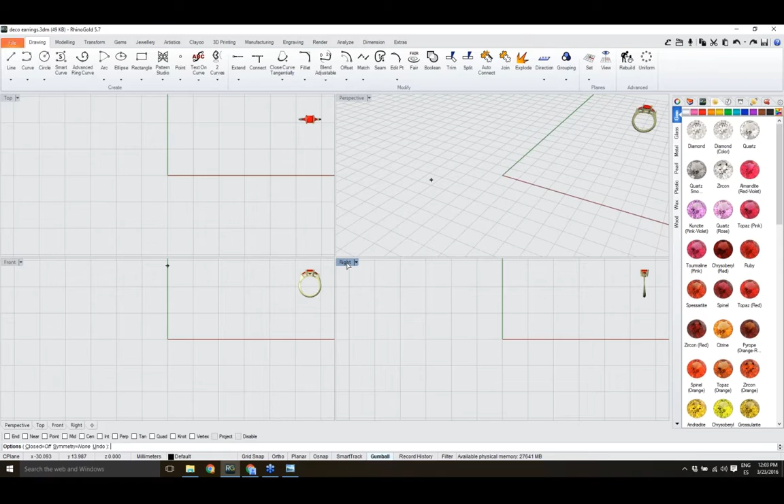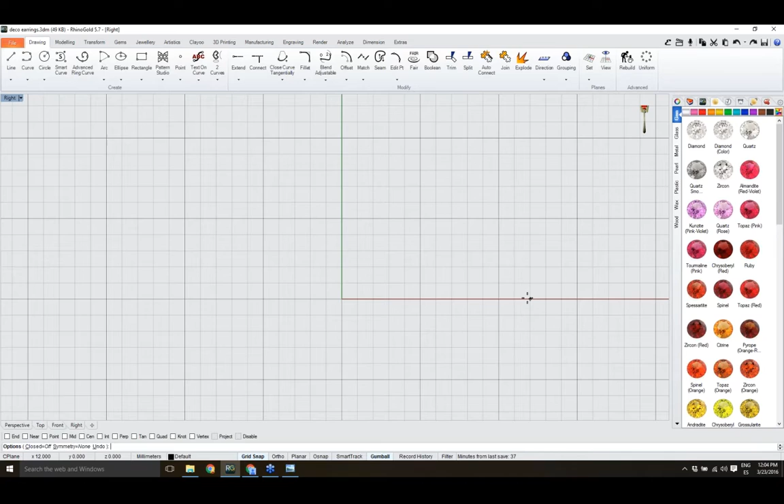I just double click to clear the right viewport, and the idea now is to define the curve, and when we are defining the curve we will also be defining the measurement for this earring. So I activate the grid snap to make sure I'm using these points from the grid. I'm going to start at these points and define my curve, the curve where I'm going to apply the earring. Using the grid as reference, we have 24 millimeters from this point to this one - this will be the length of my earrings.

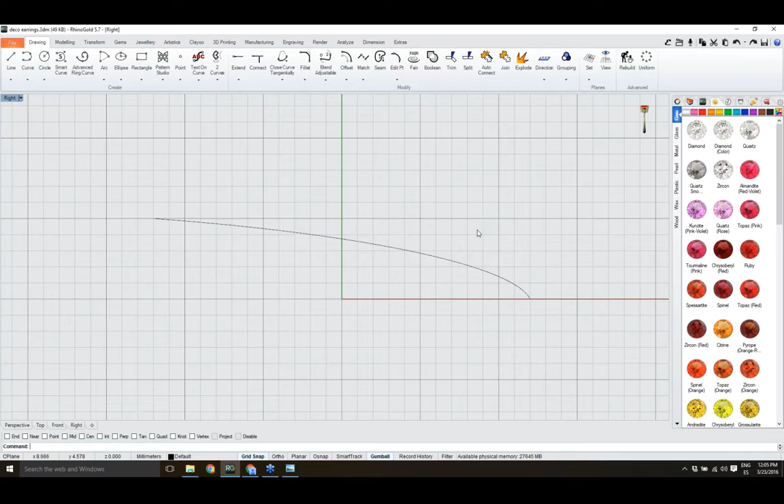Remember, if we need to change anything on the curve, we can at any moment edit the control points - just with the Edit Points tool, still under the drawing tab, if we need to adjust any of these points. In this case, I'm just going to press escape because I'm happy with the curve, I don't need to edit it. And finally, back to the perspective view, I can see my curve, and I will use it to apply a channel to define the central part of the earring.

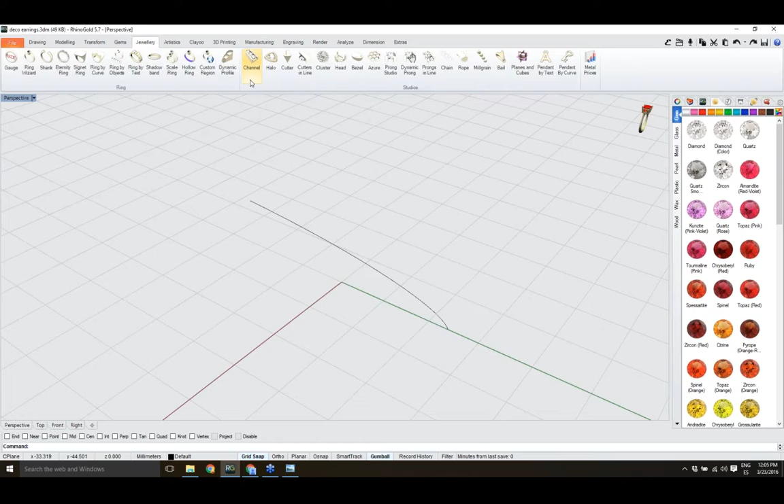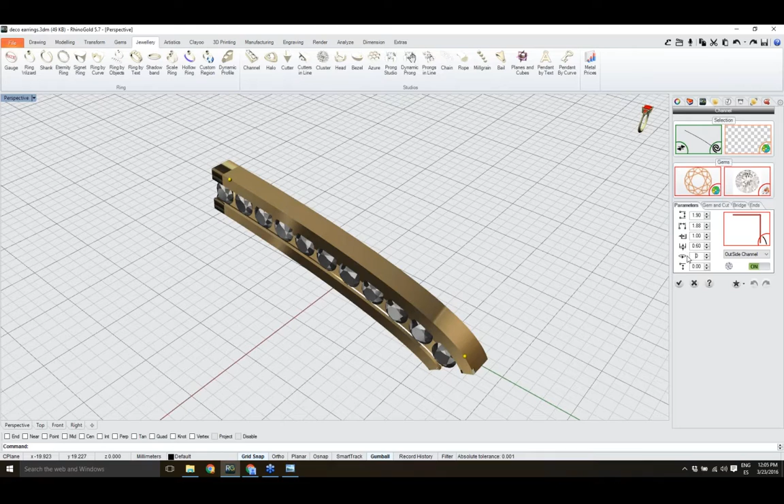To do it, under the Jewellery tab, we can find the Channel tool - this is the icon. I just click on the Channel tool, and in the side panel, the first step is I need to select the curve where I need to apply my channel. So I just click on my curve, and you will see that automatically I have a channel applied on this curve. Of course, I need to define the options - in this case I will use the rotation option to adjust the position to 90 degrees rotation, and as you can see, the channel will have the orientation to the top as I need.

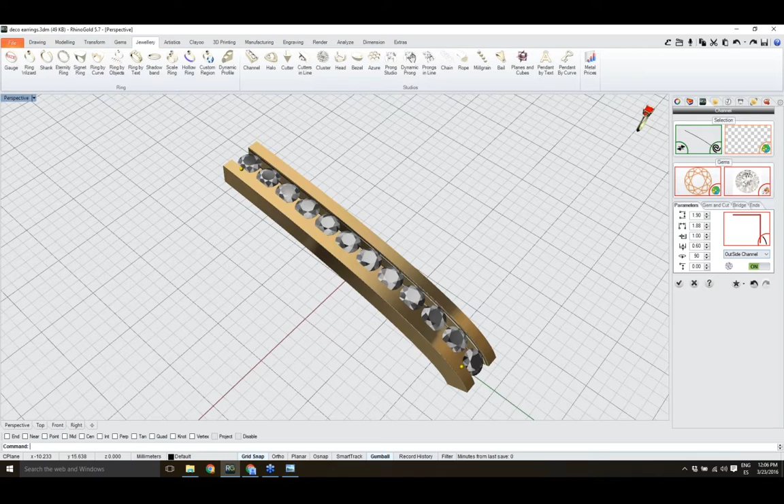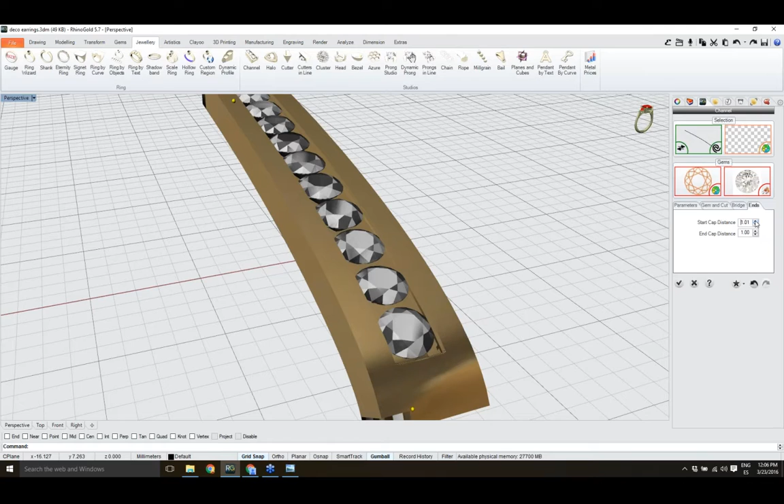Also, inside the Channel tool, we will find several options. As you can see, this is open at the end, so I have the option to use OutSide Channel - this option will allow me to make the ends for the channel. Of course, I will need to go to the Ends tab to define exactly the measurement for each one, the start and the end cap. As you can see, I can adjust the thickness here - so let's use, for instance, 0.8 in one.

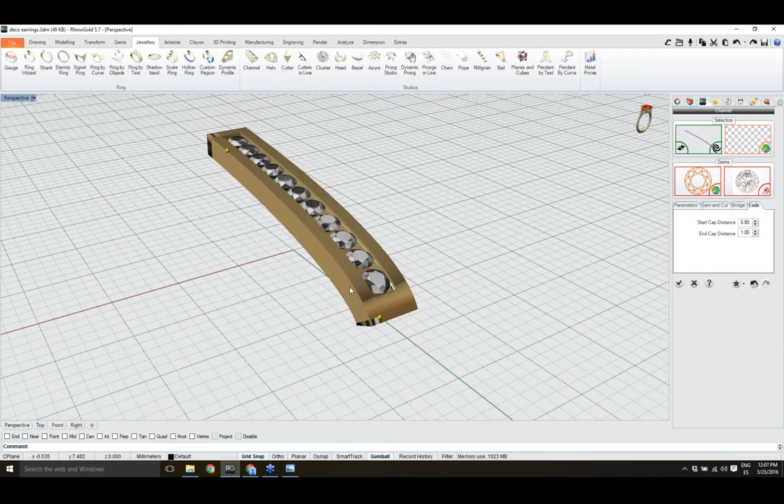So maybe not this one. The start I'm going to use 1 millimeter, and the end 0.8. We can check in here, and now we will also need to define the gem size.

So I have by default gems with 2 millimeters. In the gem and cut tab, I will find the gem diameter. I will use in this case 1.5 millimeters.

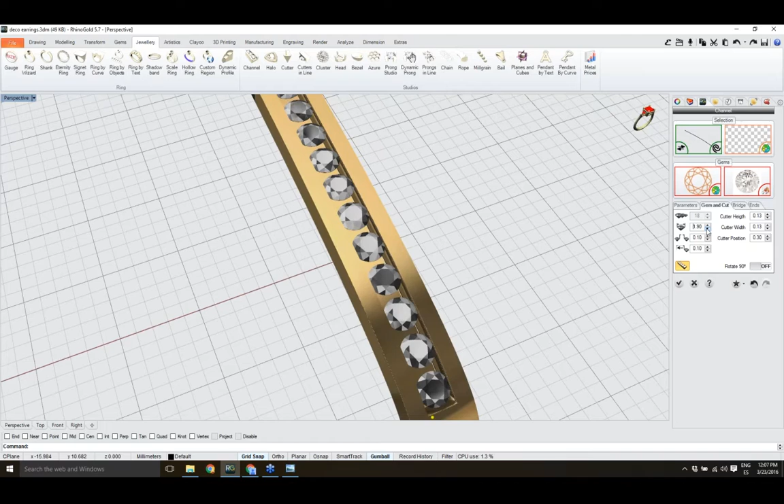So under the general parameters for the channel tool, I will define in the third option the wall thickness. I'm going to use 0.8, and as you can see, I'm defining exactly the channel I'm looking for.

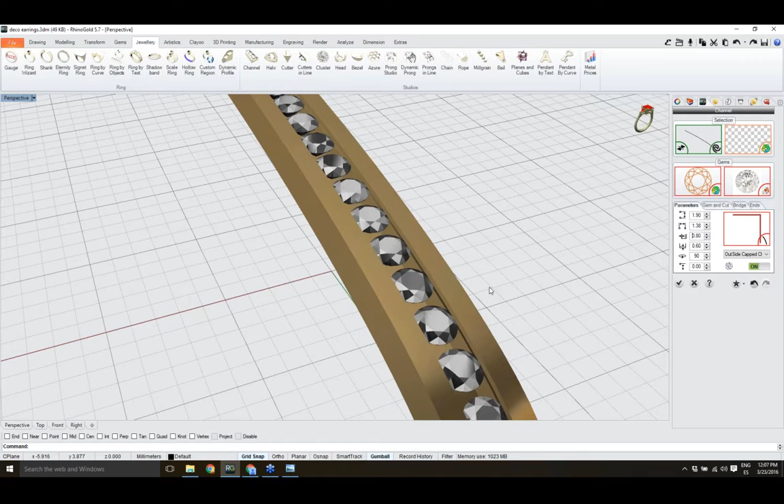Also I will need to create, I can add more gems. As you can see under the gem and cut, I have by default the option fill channel. I can turn off this option and manually adjust the number of gems, so there's a possibility to try to add as many as possible.

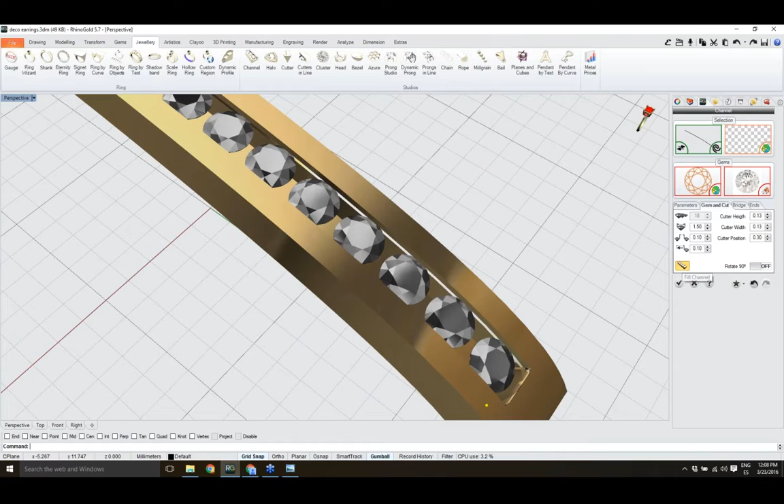And finally, I have the bridge tab. This tab allows me to, as you can see, between gems I don't have anything, and I can turn on this option to enable the bridge between gems.

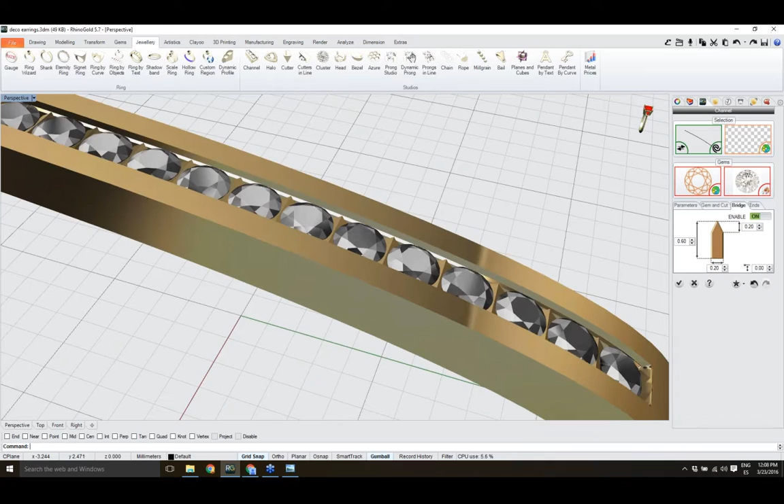Maybe I can confirm under the right view and probably changing to wireframe display mode exactly the bridge I need, and I just need to follow these measures to adjust as I want.

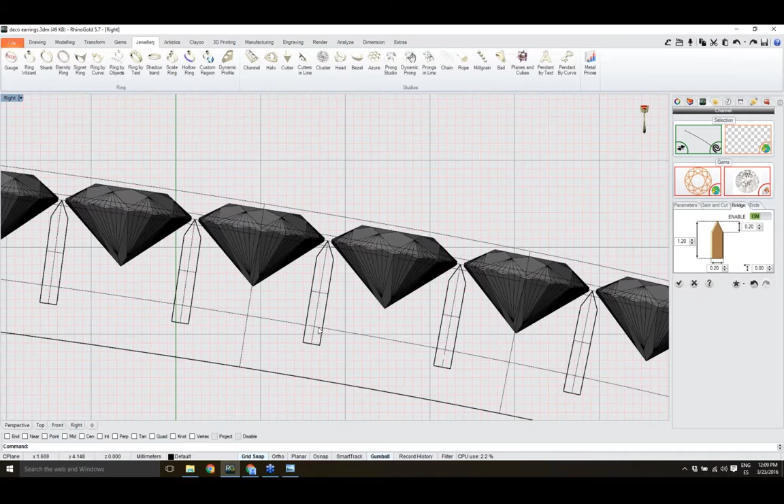So maybe a little bit deeper, I will use probably 1.2. I just want to make sure it's touching the bottom wall. And finally, the thickness, so 0.4 looks good, maybe 0.4.

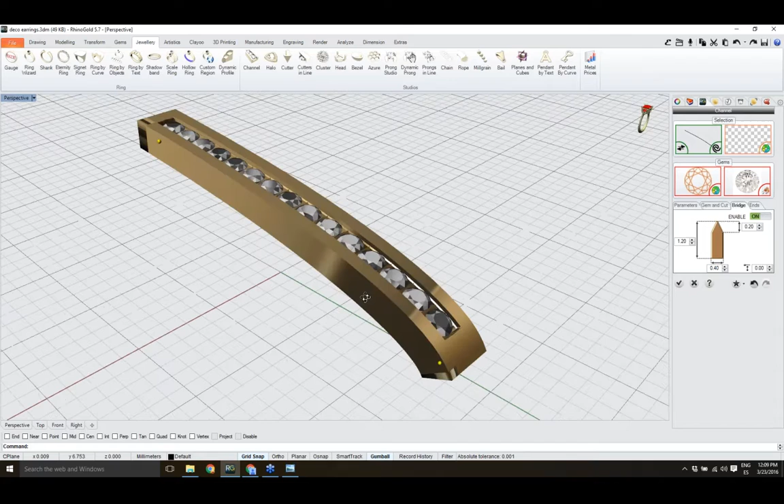And now, as you can see, the central part is correctly defined. So I just need to click OK to apply the changes. So the first one is ready. So let's now create the side one.

So let me open just the model. So this one was successfully created. I'm going now to change to the side ones.

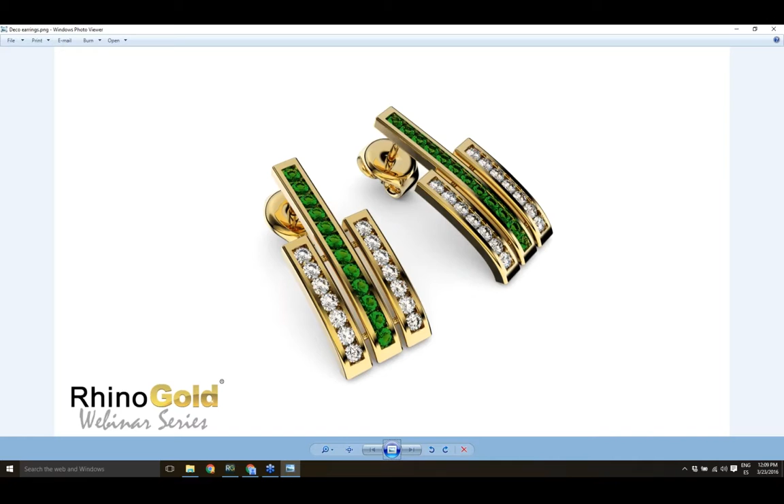So once again, what I'm going to do is select the curve I created on the first step, and using the gumball, if I press Alt on the keyboard, I can move the gumball, and of course in this case I will create a copy from the curve.

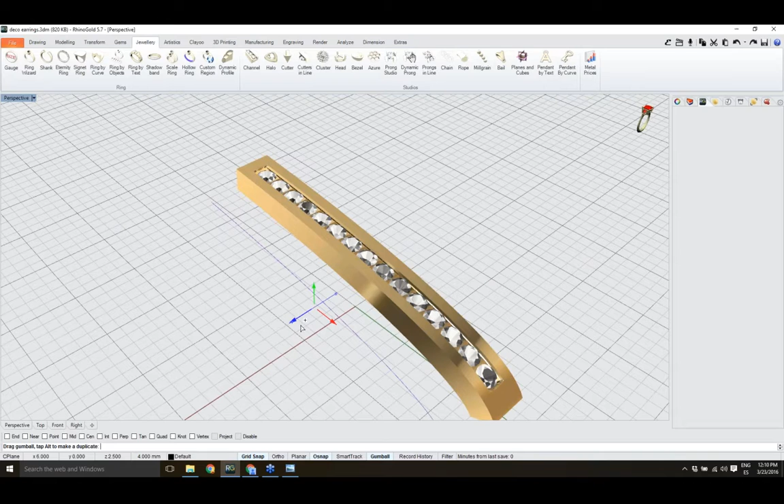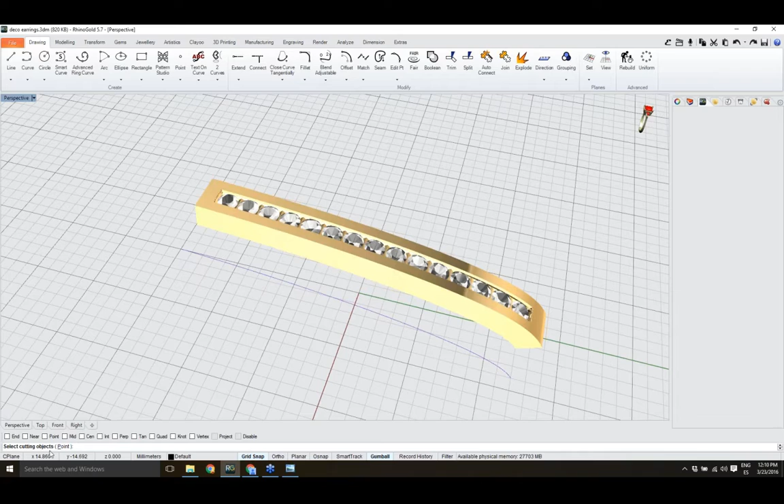So now this second curve, I will cut the curve in order to apply the channel just to part of this curve. Under the drawing tab, we can use the split tool, and in the command line, as you can see, we have the option to use a point to split the curve.

So in the right view, I can cut exactly where I need. In this case, I'm going to cut in here. Just click a point and press enter. You will see now the curve is divided in two parts, and I can delete the part I don't need.

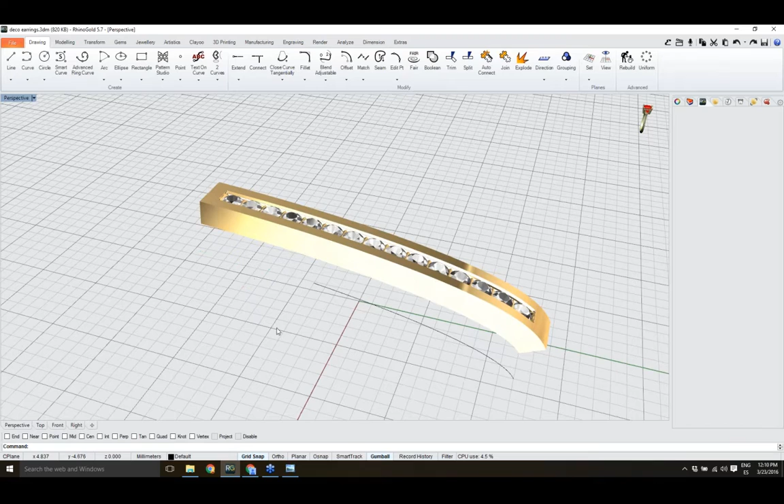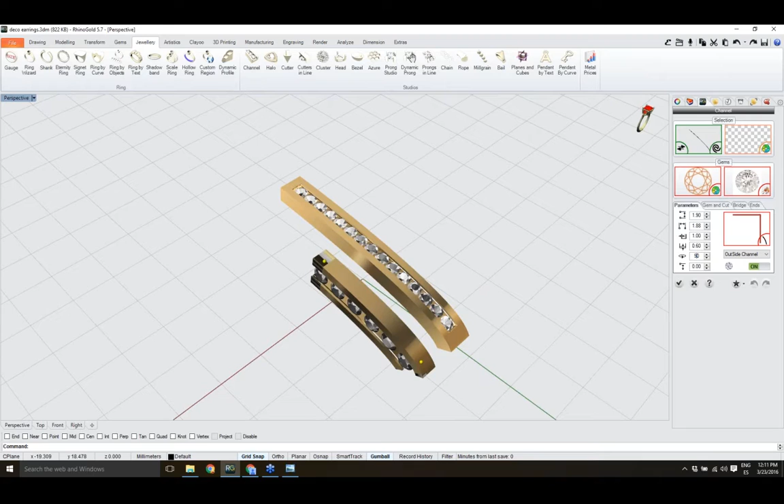So once I have the curve defined, the next step will be exactly the same. I will go to the jewelry tab, and with the channel tool, I just need to select now the new curve and use exactly the same options. In this case, I rotate 90 degrees.

I use the option outside capped channel, and under the ends I will define one with 0.8 millimeters and the other with 1.

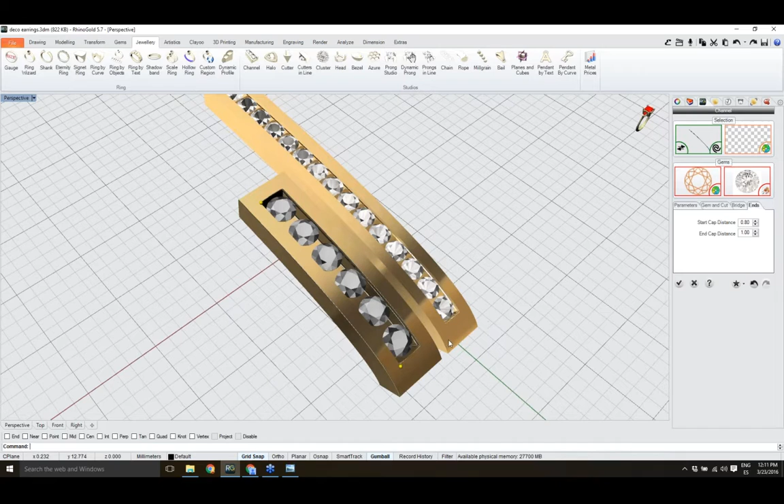I need also to define the gem size, so let's go to use 1.5 millimeter gems, and I will also define the wall thickness to 0.8.

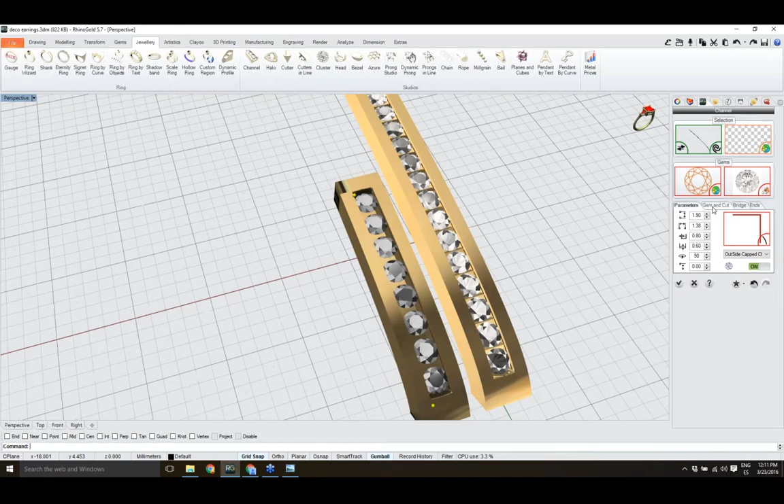Finally, maybe define the number of gems. Let's use 8 gems. Maybe I can fill channel, in this case it will be exactly the same.

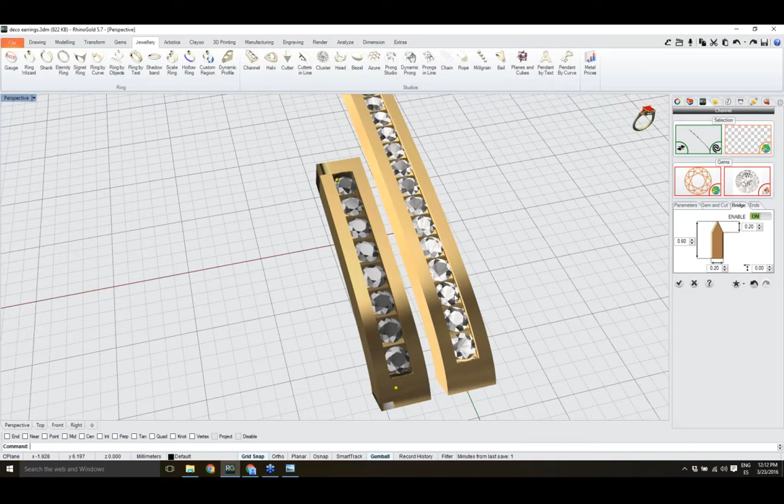And what I can do now is the final step, to use the bridge, turn on the bridge option to make sure I have this metal part between gems.

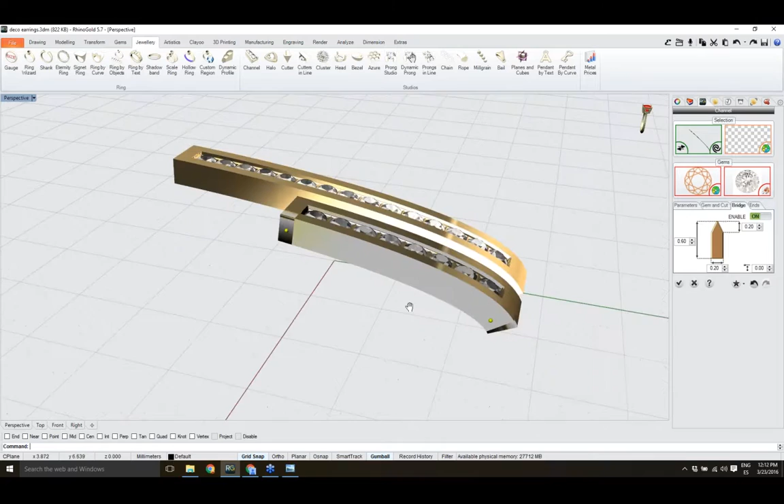So as you can see, this is really easy. Just using the channel tool, we can define all the options we need in order to define exactly what we are looking for, and I just in the end click OK to apply the changes.

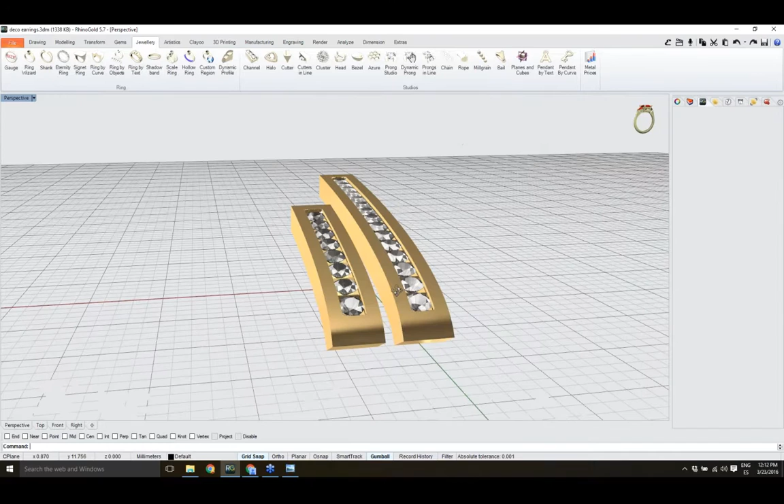So on the other side we will have exactly the same. I will use the symmetry, but before that I need to connect both parts, and under the modeling tab we have the cylinder tool, which I will use to connect both parts of, in this case, both channels. So maybe in the right view it's easier.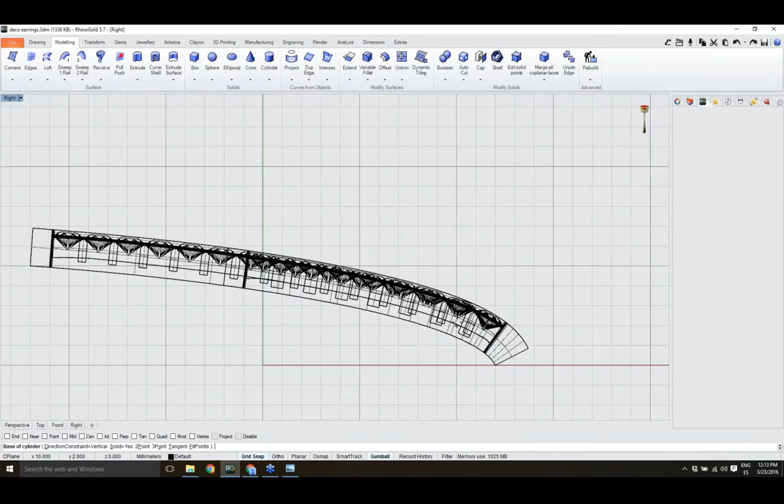I just need maybe to remove the grid snap. I just need to define the central point for the cylinder, so it can be here, and I will use the option diameter, and I will define 0.8 millimeters.

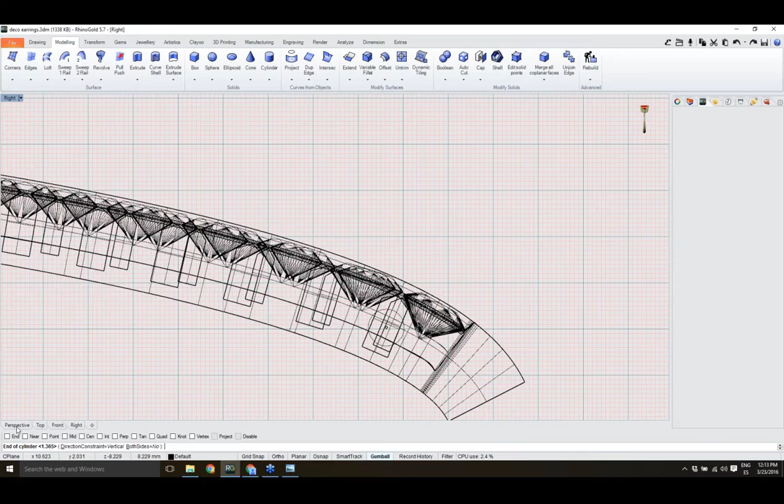So 0.8, and back to the perspective, I need to define the extrusion distance. Something like this will be more than enough, and then I just need to move in order to make sure both parts are connected.

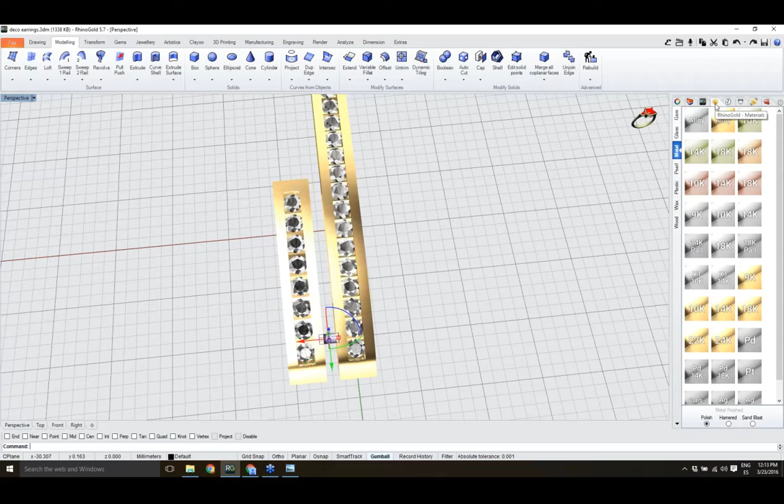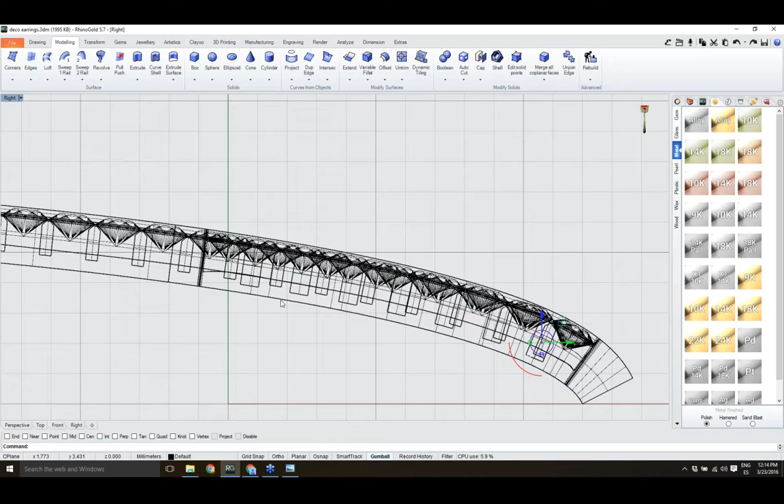Once again, I will copy, in this case, the cylinder using the right view, just to make sure I will have a good connection. I want both sides connected, one in the top, other in the end. So I'm going to use, under the transform tab, the copy tool, and I just copied this cylinder also to this area. Somewhere in here will be perfect.

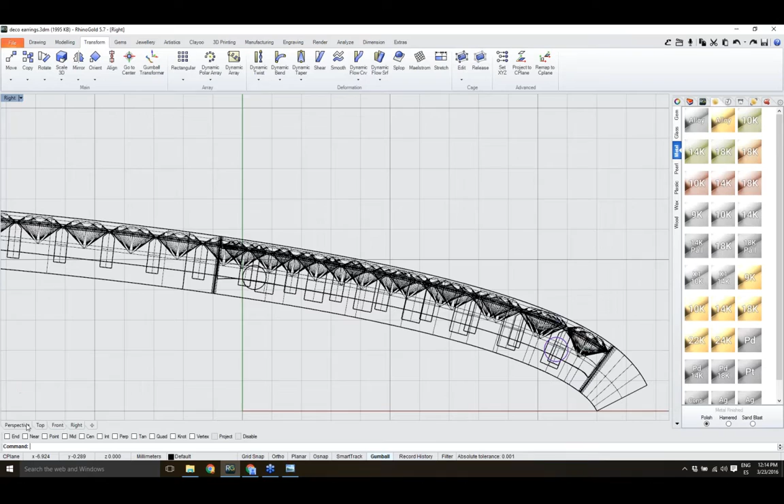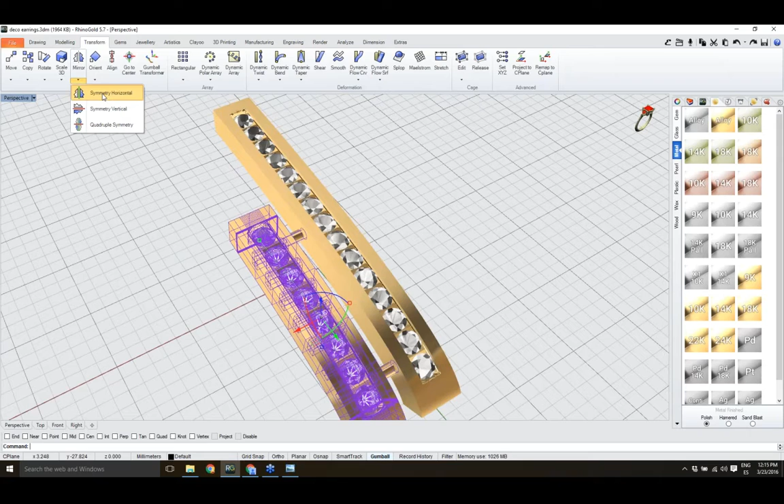Back to the perspective. As you can see, we have both parts connected, and now I can select all these parts, both channel and cylinders, and using the symmetry, in this case horizontal symmetry, to make exactly the same in the other side. Really easy so far.

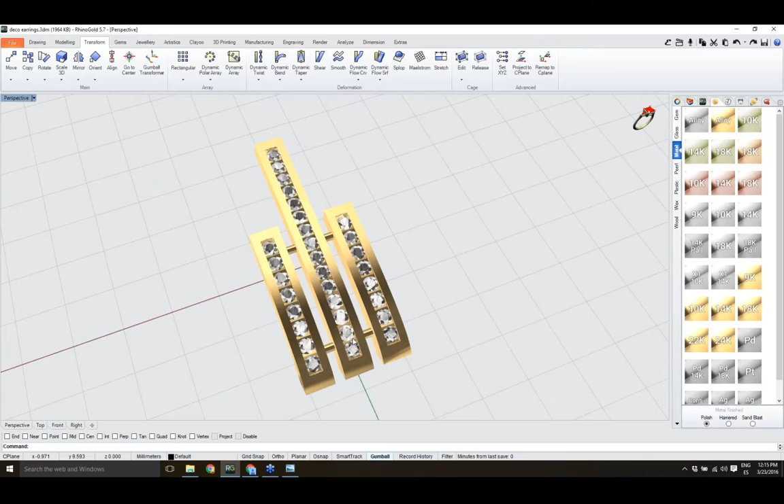Maybe in this one I can edit just to make sure. I will use the gem material I want. In this case, instead of diamond, I want to use emerald. Just click OK to apply the changes.

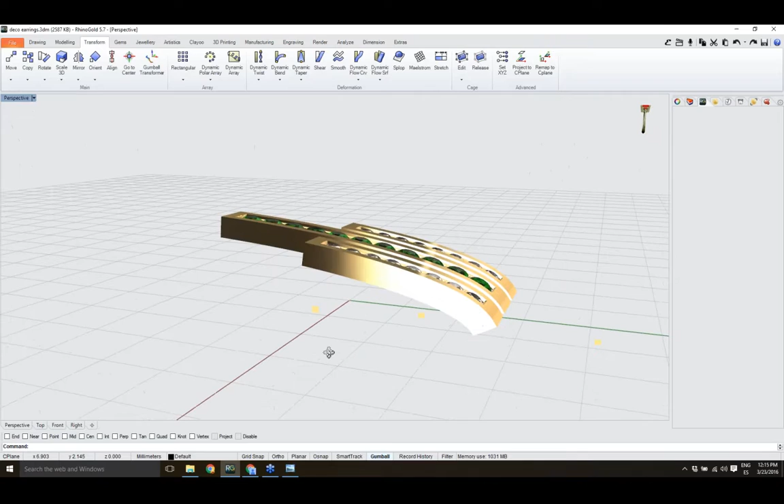Finally, we need to define the back part of the earrings. I will use the elements for this, will be easier. So elements icon we can find in here. I just click on elements, and I'm going to the findings family to use the one I'm looking for. I'm going to use the number 7.

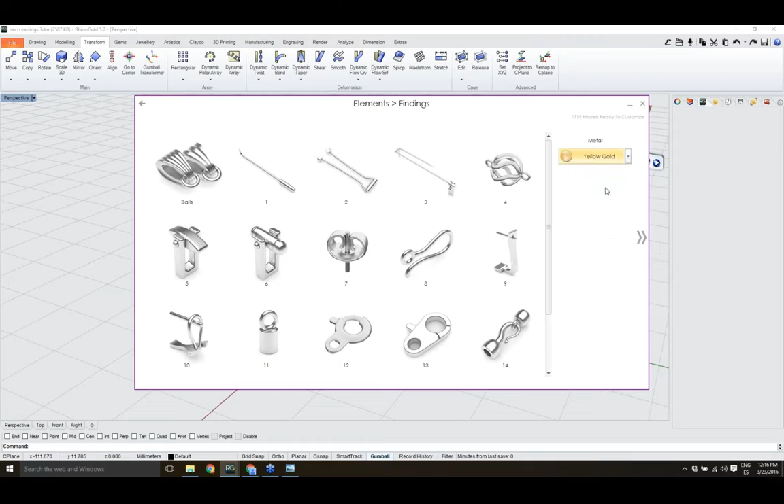I will just open this side panel to define the material. I want yellow gold, and I click on the number 7 to add to the document. Okay, so here we go. We just need, of course, to place in the correct location.

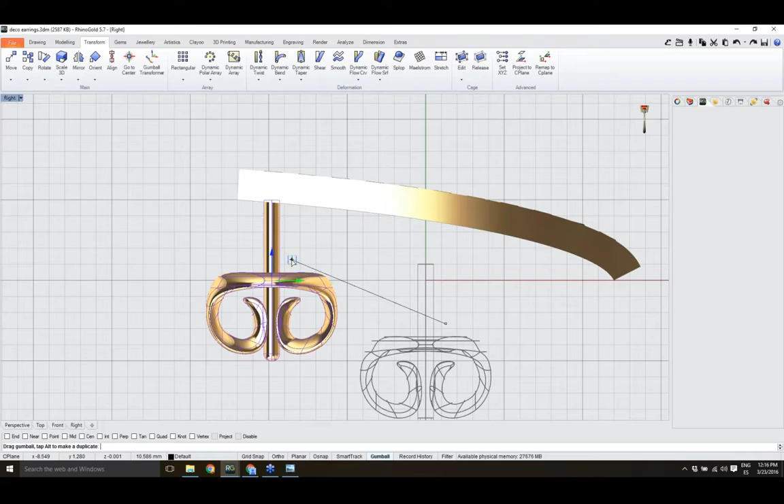Maybe in the right view it's easier. Let me go back to the render display mode. I place my model, in this case my object, exactly as I need. Back to the perspective just to confirm it is as needed. I think we have everything defined correctly.

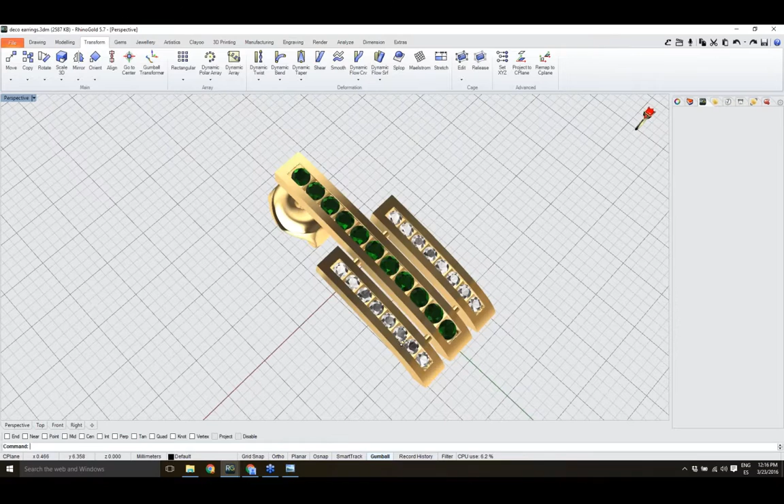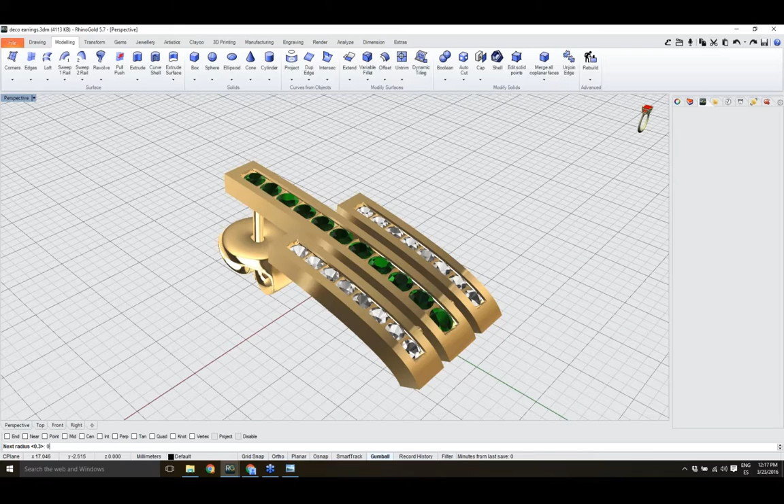I just need, if I want to create some tool to break these sharp corners, I can easily use the fillet tool under the modeling tab. So variable fillet, I can select first the radius. I will use 0.5 millimeters, and select, of course, the edges to fillet. In this case, all these edges in the top of the channel, and let's go back to the render display mode.

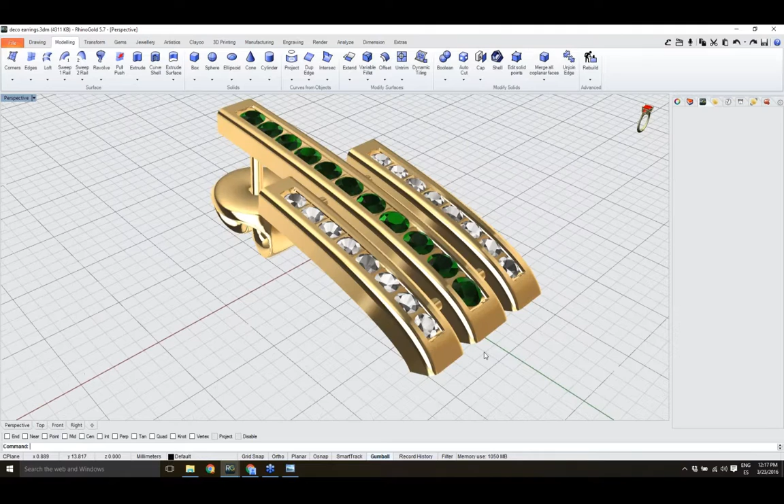Now I will do exactly the same to the bottom edges. I just want to avoid these sharp corners, a little bit rounded. And now I can do the same to this end.

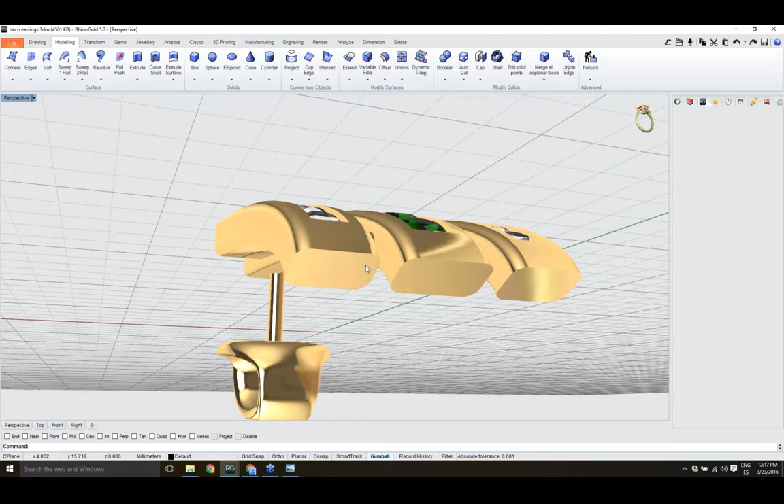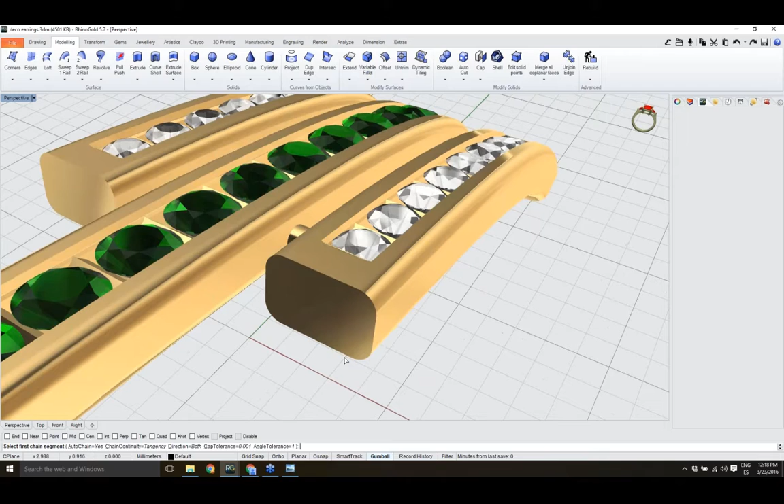To do it, I will select again the variable fillet tool, but now for the ends I'm going to reduce a little bit. Instead of 0.5, I'm going to use 0.3 millimeters. I just want to apply it to all this outside part. Let's see, the fillet radius, it's enough, it looks good.

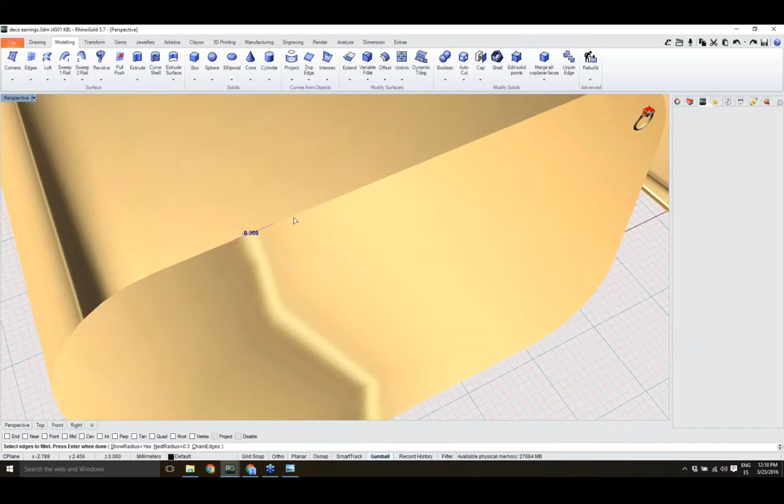So I just select these edges. You see that I use the variable fillet tool, and if I select just the edge, you'll see that it selects edge by edge, so I need to select several times. If I use the option in the command line, chain edges, I just click on one, and it will automatically use all the edge I'm looking for in order to fillet.

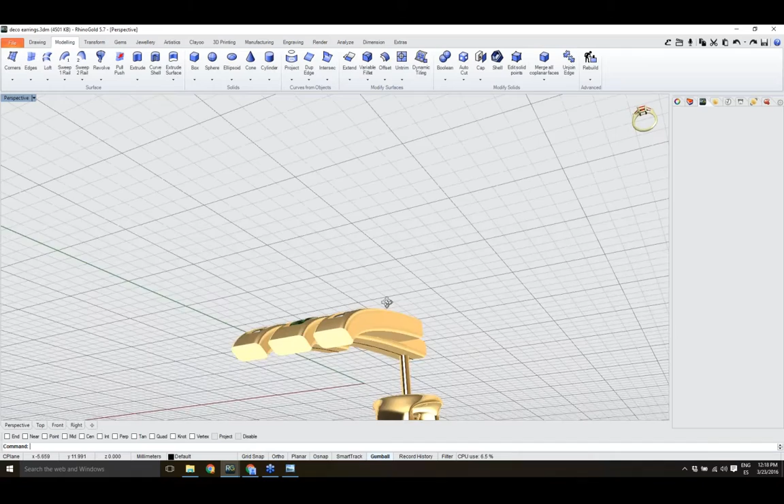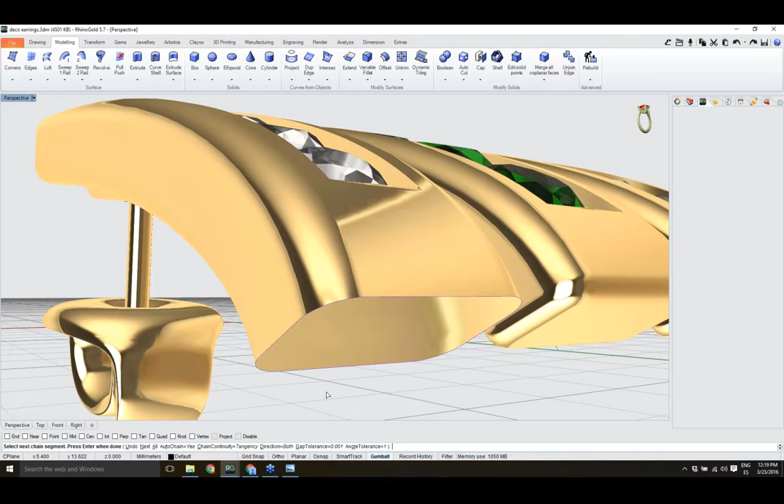So now, finally, these parts, once again, I use the chain edges option, and I select the entire edge. The same in this one. And finally, this one also the same.

As you can see, the model is ready. Really easy. Of course, the other will be just a copy, the left and right are exactly the same.

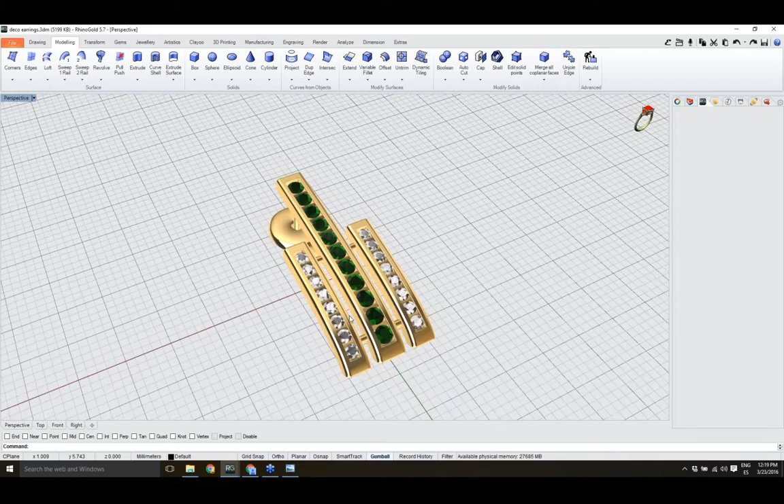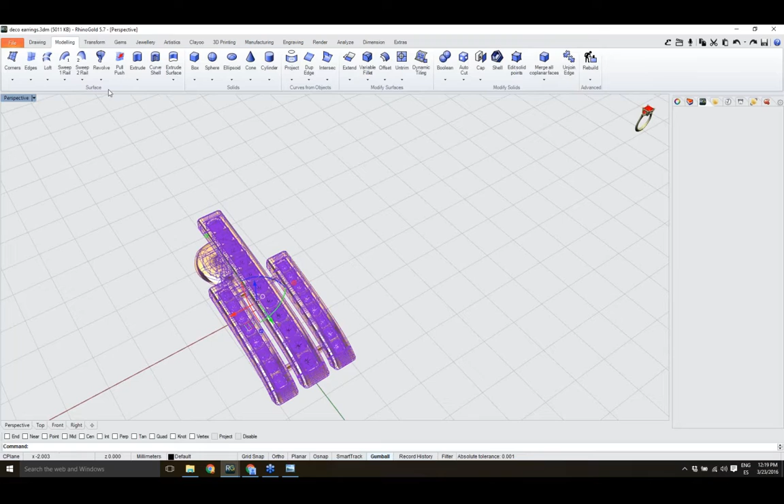I'm going also to create the render just to show the final process. To do it, I'm going to define my copies. So I'm going to select all the object, and with the copy under the copy tool and the transform tab, just select origin point, and then the second point to copy my earrings.

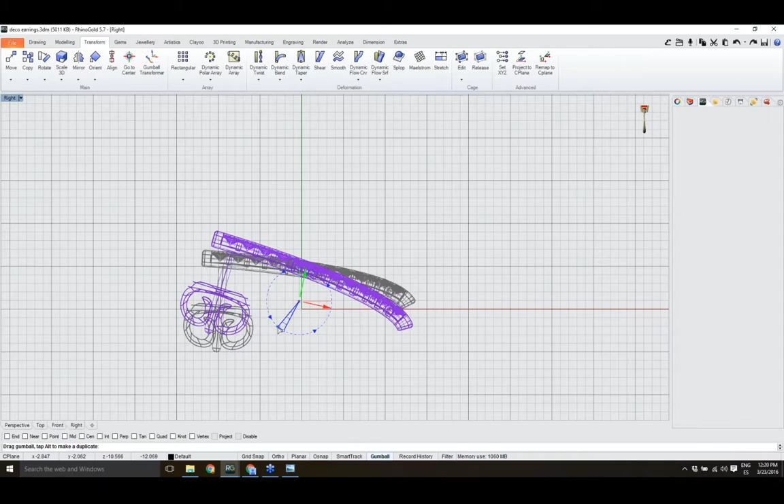Back to the right view, I can adjust the position for the render, so maybe rotate a little bit in this direction.

Now I can open Render Studio in order to define the render for my earrings. Let's go to the Render tab, and in here we will find the Render Studio tool. So I just open my Render Studio.

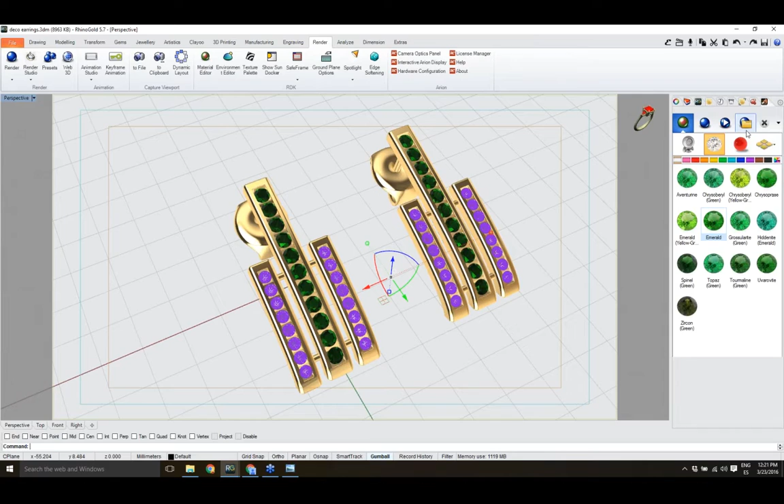To make it easier to apply the materials, I can go to the RhinoGold material selector and select, for instance, diamonds - these are the real-time materials. Now go back to the Render Studio materials, and in here go to gems, and I apply the diamonds from the Render Studio. Remember, Render Studio materials are for render, and real-time materials are the ones we use in RhinoGold to know the weights - they are not for these materials, we shouldn't use these to render.

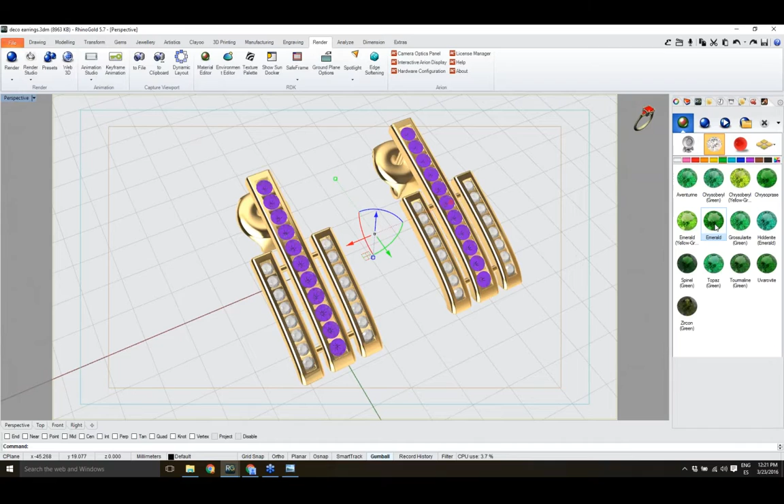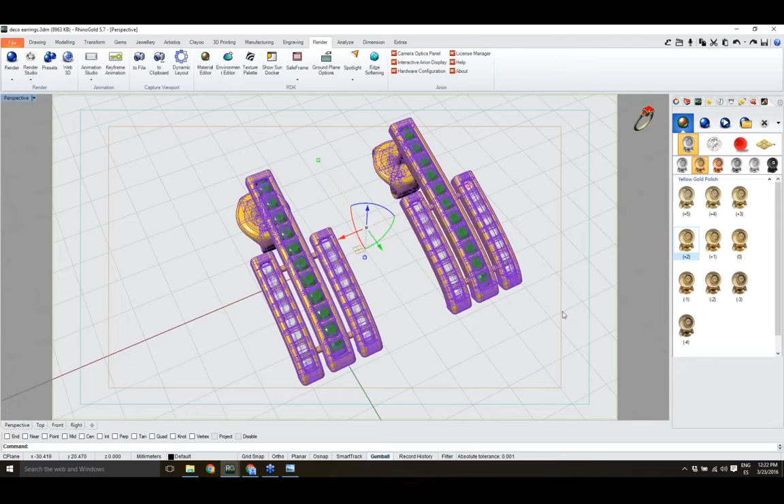So remember always to apply the render materials. In this case, the emeralds - I just select from the material selector, then go to emerald in Render Studio and double click to apply to the selection. Finally, once again, yellow gold - I select yellow gold, and then under the metals I can apply any of these golds. In this case I apply this one.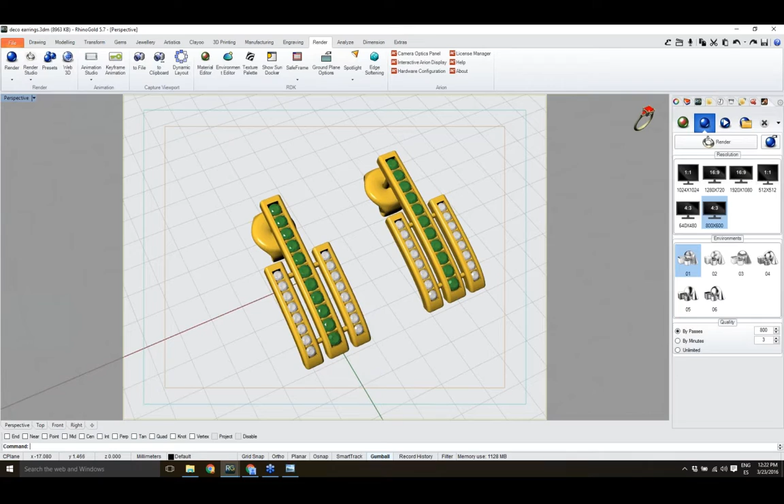Once I have the materials applied, I can apply them now under the render tab. I can define the resolution, so we can use different types of resolutions, and once we define the resolution, I just need to click on render to start calculating the render.

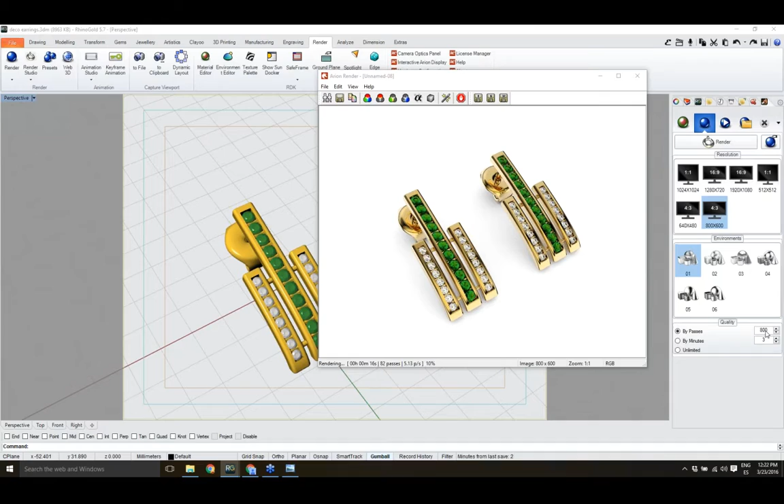So here we go, at this point we are calculating the render. I've defined 800 passes by default, but I don't believe this model needs so many passes. So remember, I can stop once I feel the render is good enough.

And as you can see, really easy to create these earrings. Let's just wait a little bit more to finish the render. It's still calculating, I believe it will improve even a little bit more. And this is the idea.

Remember, if we don't apply any ground, by default we have this white ground, but we also have several other ground options under the Render Studio materials to apply the ground on the render. And this is it, we are almost at 400 passes - I believe it's more than enough.

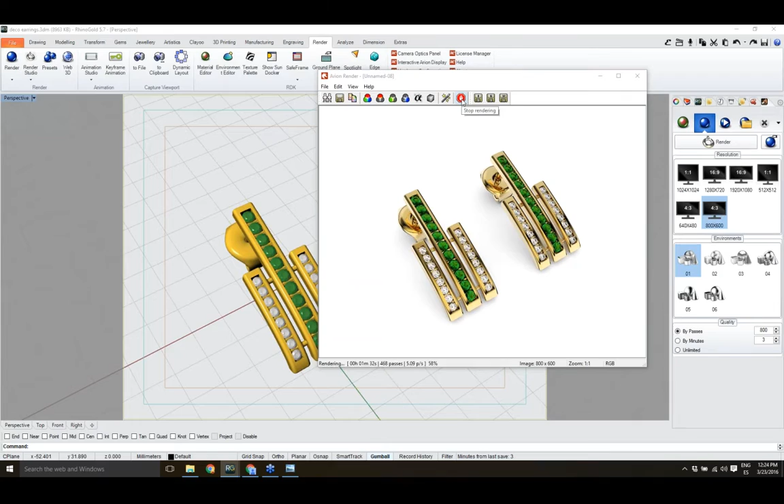I will wait until 400 and I will stop. It looks good. This is the idea, now I can just stop the rendering here. I believe it's more than enough.

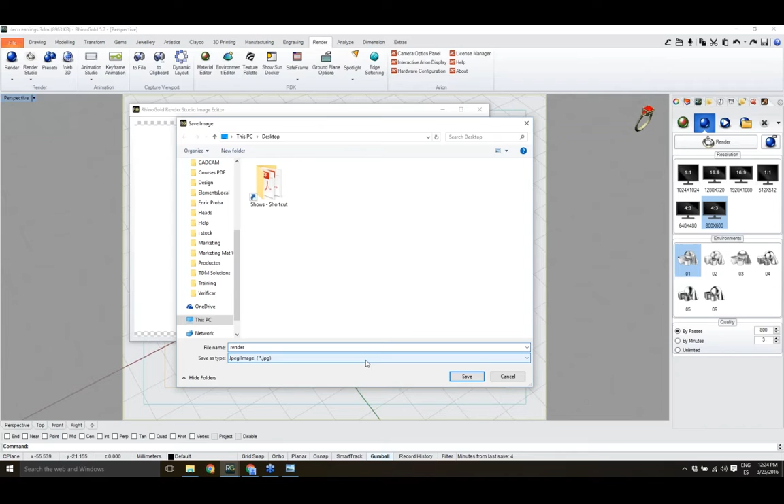We have this image editor after the render where we can adjust a little bit the brilliance, the contrast, and so on, apply some logo if needed. So there are several options, and finally I just need to save my model, in this case my render. I just define the location where I want to save, the file format - in this case JPEG. So I just save it, and here we go.

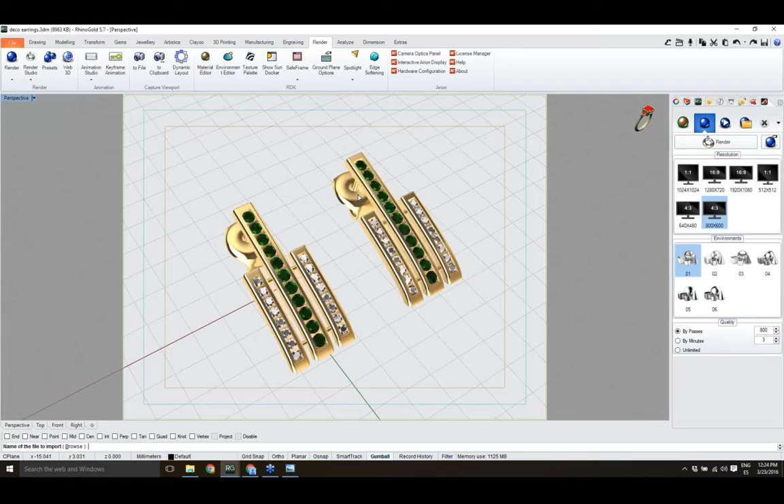Model render done. I can close Render Studio on this icon and go back to the design file. So I just say yes to go back to design file, as you can see. And this is the idea.

Really easy - as you can see, we have made the model and renders in 20 minutes. I believe it's a nice exercise so you can practice the channel tool. Mainly, it's the main tool we use on this model, but of course the rendering resources are really nice too.

And please, Stephanie, let me know if there are any questions, anything you would like to take a look at.

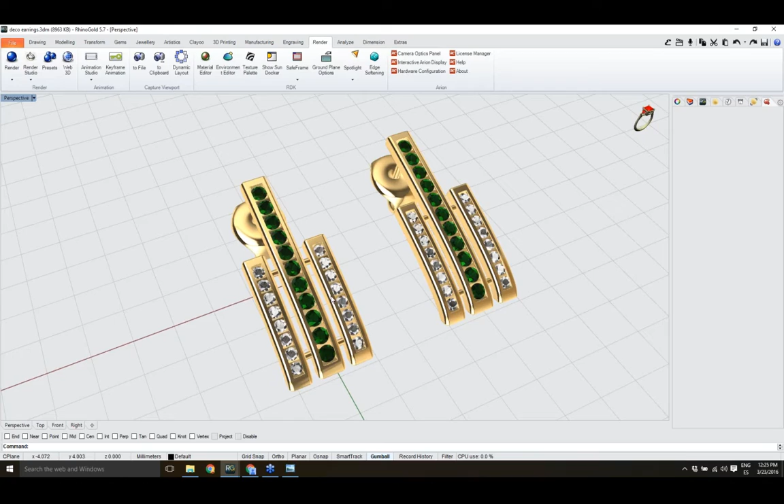Hi Pedro, that was brilliant. Thank you, that was amazingly quick. They're very beautiful, thank you - I'd quite like a pair. They're lovely, yeah. No questions so far, but if anyone has got any, then do send them over now.